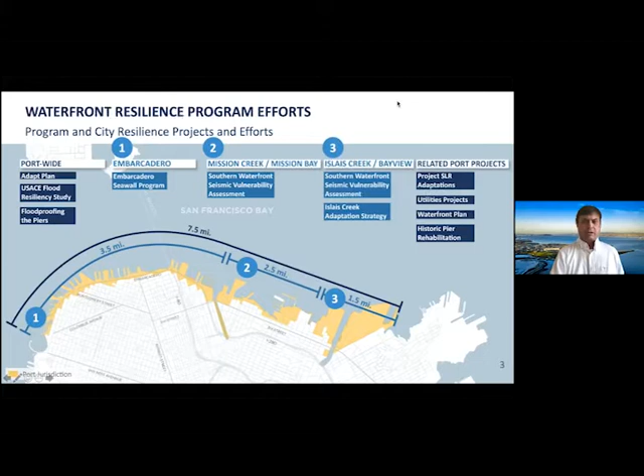So digging into the Army Corps of Engineers flood study a little bit, the Army Corps are the nation's flood experts. They build most of the flood control projects around the country. The way you get started with the Corps is something called a New Start. We were lucky to get a coastal New Start, primarily because of our really strong congressional leadership in 2018.

It's a 50-50 effort. The study period is between 2018 and 2025, and study is a bit of a misnomer for what is going on here. We are assessing flood risk, so that part is a study, but we're actually working with the Corps, with city department partners and the public to develop coastal flood protection projects that will minimize this risk. And if the Army Corps finds a federal interest in a project like that, and makes a recommendation to Congress, it opens the door to potentially billions of dollars in federal funding. Federal government will contribute up to 65% of the project cost and will actually build it. So it's one of our most important efforts in the Waterfront Resilience Program.

I've already talked about this a bit. We're looking at seismic and flood risk in the resilience program. We really want you to think in this presentation that this is a multi-decade effort. It took 40 years to build the Embarcadero seawall and the historic piers that are connected to it. And the effort that we're talking about here is of a similar scale and time scale. We're going to have to develop local, state, and federal funding sources to fund the program.

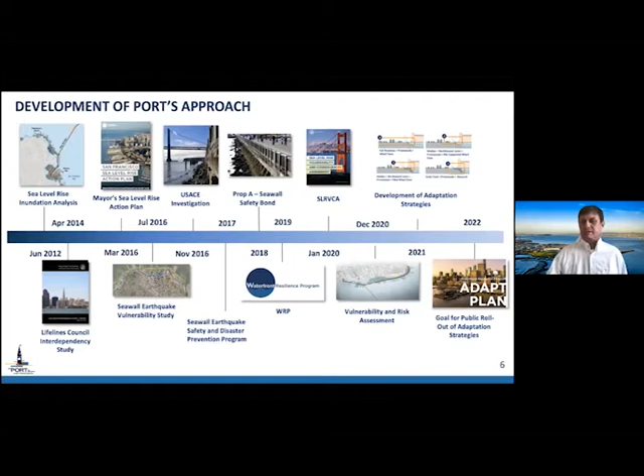So we've spent a lot of time documenting all the public and private assets and infrastructure along our shoreline in the future floodplain. We've conducted a multi-hazard risk assessment looking at consequences of earthquake and flood risk to our waterfront. We've begun to develop measures to address those risks. We're combining all of that information in developing the adaptation strategies that I'll talk about today, gearing up to provide program recommendations to the Port Commission at the end of this year. And that's really going to enable us to move forward in terms of the first projects that will be funded by Proposition A.

So now I want to share some of the risk assessment work that we've completed. First, I'll just mention about this waterfront. It's a human-made waterfront. It was built starting in the late 1800s through about 1915 with the intention of creating a deep water port.

San Francisco was surrounded by mud flats, and they really went out to deep water. They dug a trench. They built a rock dike about 100 feet wide and 40 feet tall. It really was a marvel of engineering.

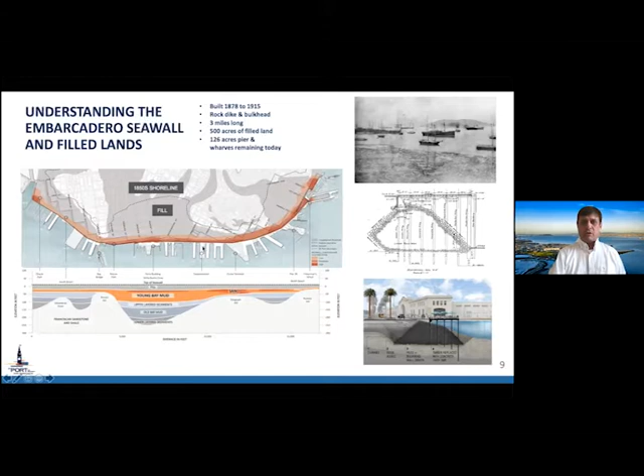Unfortunately, what they didn't understand at the time was that they were building on very weak soils. You'll see in the ferry building area on the map here that there's very deep Young Bay mud in that Yerba Buena Cove area. We also have sand conditions along the waterfront, which are weak soils. And that has led us to an understanding that we have a significant earthquake risk problem and shoreline stability problem along the waterfront. So this gives you a sense about what they constructed.

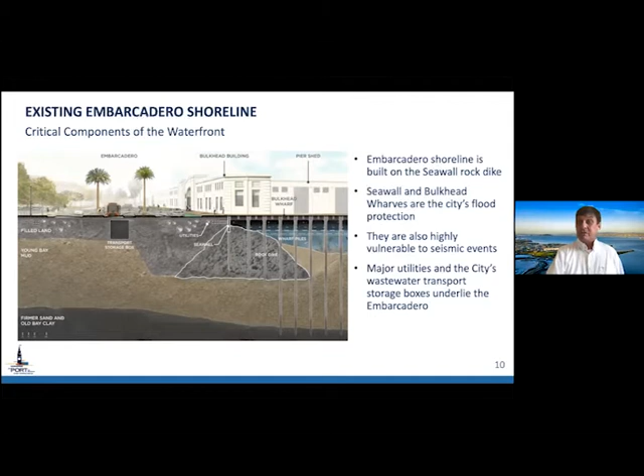After they built the seawall, they filled behind it with unengineered fill. The beautiful bulkhead buildings that line the Embarcadero are supported on wharves that are supported by piles driven through the seawall. And we have major trunk infrastructure serving the city in this zone. In a major earthquake, like a 1906 earthquake, we're concerned about the following result.

These weak soils, including the Young Bay mud and unengineered fill, will liquefy. This is all on a slope, so things will push down the slope, pushing the seawall bayward. We've seen this lateral spreading kind of condition that can cause quite a bit of damage. We witnessed it in Haiti in the earthquake there, and you'll see we have evidence of this lateral spreading along our own waterfront, near the Pier 27 cruise terminal after the 1906 earthquake.

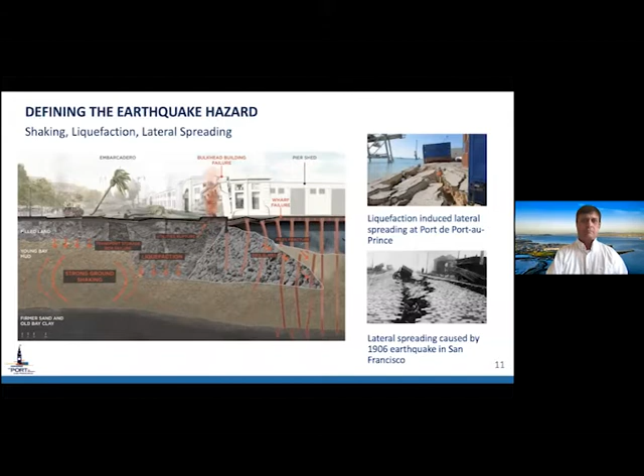How high? We're looking at a range of sea level rise curves. The California Ocean Protection Council published its projections for sea level rise based on the latest science in 2018. The most likely curve results in about 3.5 feet of sea level rise by 2100. Under a more extreme scenario, where we don't do much to stop greenhouse gas emissions, we could see up to 7 feet of sea level rise by the end of the century.

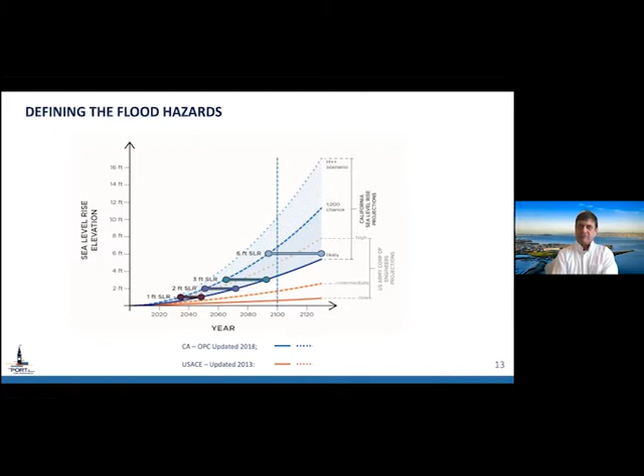One of the policy conundrums we're dealing with right now is that the Army Corps of Engineers has older sea level rise projections, shown here on this graph. We're trying to reconcile the state guidance and the federal guidance because we're accountable to both.

Thinking a little bit about the water column, we have daily high tides, then we have something called 100-year flood events. These are very low probability events, large storm events that can produce storm surge and wave action at higher elevations. With sea level rise, we'll see the elements of the water column increase over time until eventually high tide would overtop the shoreline. We're going to have earlier impacts too. At about 2 feet of sea level rise, we'll start seeing groundwater rise as a result of the tidal influence because we have a permeable shoreline, and that could start to affect important infrastructure in the Embarcadero.

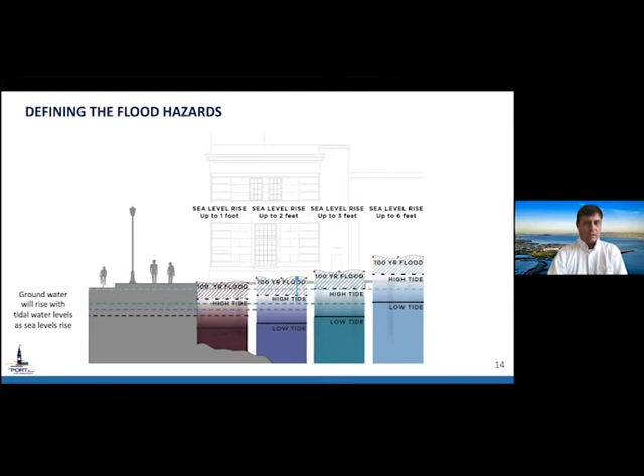So we looked at these risks, everything that is publicly and privately owned in the future floodplain and in the earthquake risk zone, and calculated up to $30 billion in damage and disruption from combined seismic and flood risk by the end of the century. And this is in a do-nothing scenario.

Obviously, we're standing up this program to address these risks. We saw very significant lateral spreading risk in the ferry building area and along the piers and wharves all the way up to Fisherman's Wharf. We're also seeing very significant seismic risk to the Embarcadero itself, the transit infrastructure and utility infrastructure there. And we see a tipping point between 2 and 3 feet of sea level rise where we start to see significant flood damages into downtown.

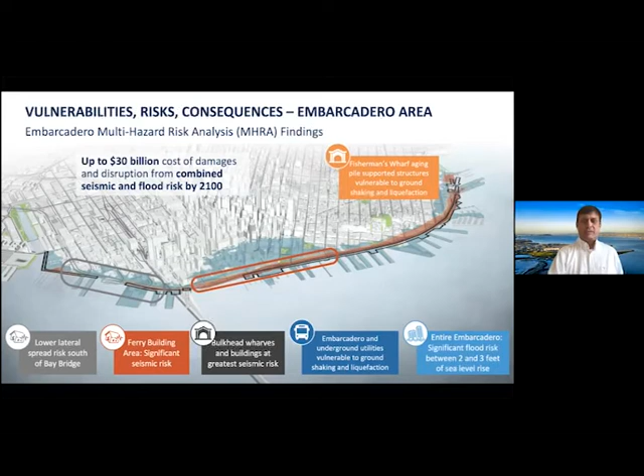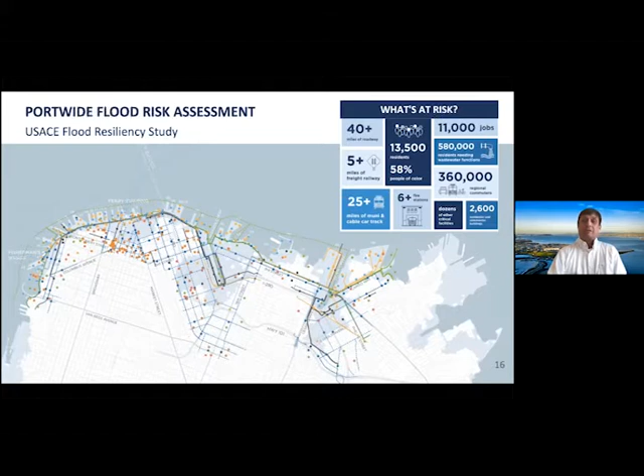This multi-hazard risk assessment was really focused in the Embarcadero area to support Proposition A investment. We're also looking port-wide with the Army Corps of Engineers. This shows the future floodplain, and we've got very significant employment activity in this area. These are very diverse neighborhoods, 58% people of color, with significant city infrastructure, Muni, and SFPUC infrastructure in this area. So all of this is going into probabilistic flood analysis, looking through the end of the century, so that we can design shoreline protection to reduce the risk.

So now that's the risk. Now I want to turn to our planning effort and how we're working to buy down that risk. We've been out in the public all through this process. It's been very important for us to understand the public's priorities so that as we enter this planning process, we're bringing those priorities into our thinking.

They very much affirmed a focus on life safety and emergency response. They identified up and down the waterfront the assets that they prized the most, and really encouraged us to think not just about infrastructure or the shoreline, but how people use the waterfront, what they love about it, why they go there, as we enter this planning effort.

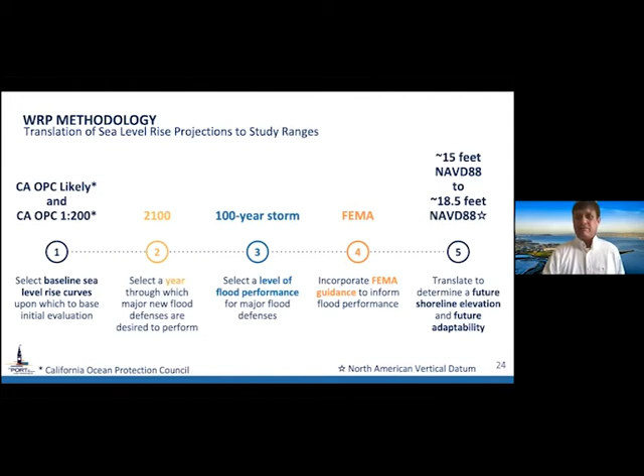And just to give you a visual example, I don't know how many of you have been down to the new Water Emergency Transportation Authority terminal, downtown terminal, right south of the ferry building. They've designed this to be resilient to sea level rise through the life of the infrastructure, and it's quite a big elevation change. So imagine that level of change along the waterfront, and you can begin to visualize the significance of the work that we're starting to undertake.

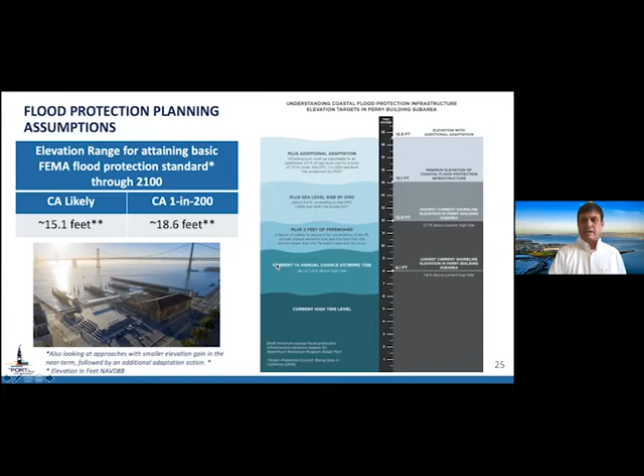So I just want to walk through the different zones of the waterfront. I think we all know how varied it is, but we have a gorgeous waterfront. We want to maintain that connection to the bay, continue to provide a place where people want to recreate and enjoy bay views. But it is very distinct.

We have unique conditions like Mission Creek that pose their own unique challenges, and the industrial southern waterfront that is so important for the port's maritime activities and in terms of providing jobs and an industrial base for the city in the southern waterfront.

So the adaptation strategies that we'll develop, implementable over decades, will include initial projects, big moves, essentially coastal flood protection, some policy considerations, and of course, further planning efforts, because we do need to plan at that neighborhood scale.

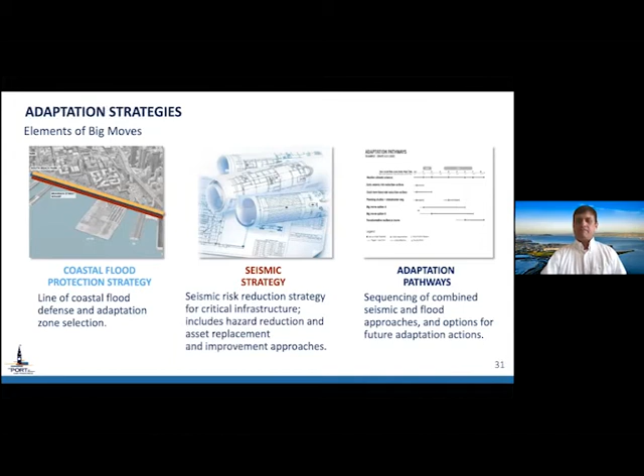We're developing a range of adaptation strategies that we're then going to evaluate through these evaluation criteria. These are the categories that we'll use: feasibility and performance. What does it mean for our neighborhoods and waterfront users, society and equity? The cost of these improvements relative to the amount of damage they'll reduce, and then environment - what can we do to improve the shoreline environment?

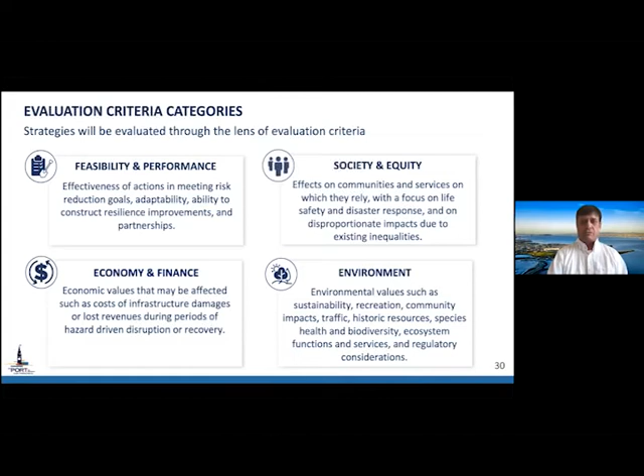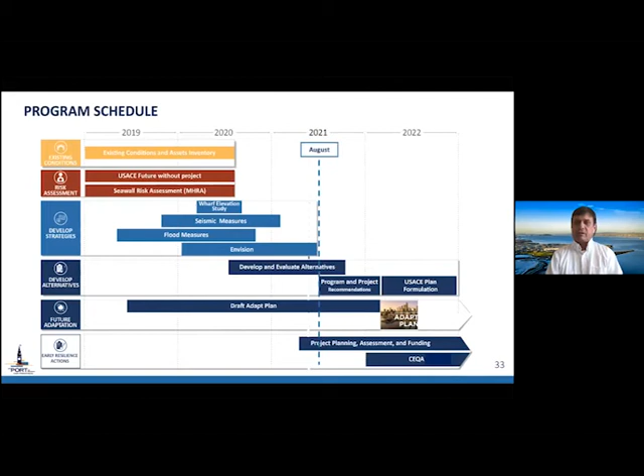Here's the schedule for the next couple of years. We're developing these program and project recommendations, gearing up to release a draft ADAPT plan in the early part of next year. Everybody will have an opportunity to weigh in on very tangible recommendations for how we would address the shoreline. Then we would start work on Proposition A projects, smaller projects to improve life safety and disaster response, and start CEQA on those projects.

All of this is going to be a multi-billion-dollar effort over time. We've got some secured sources like the bond. The Army Corps study could lead to very significant federal funding. We, of course, have our public-private partnerships, which are our primary mechanism at the port for attracting private investment in the waterfront to provide a range of public benefits.

And we're going to need to seek new sources. We're very happy that the state of California's budget included $3.7 billion in resilience funding. So they're really recognizing the need to act now at the state level.

Closing with a focus on Proposition A, we're through the planning phase. We've identified a range of projects to improve seismic performance along the waterfront and flood risk where we can. We're looking to get the Port Commission's endorsement of the first project so that we can begin design, environmental review, and move into construction of those projects by 2024.

Which will provide some really important economic opportunities. And so we're looking at the types of projects that we're developing, understanding the training programs that are in process and the opportunities that we could point those entry-level trainees to, so that we're providing good work opportunities for San Francisco residents. And we're also thinking about how do we prepare local business enterprises to team up with prime contractors so that they can be successful in bidding on some of this work.